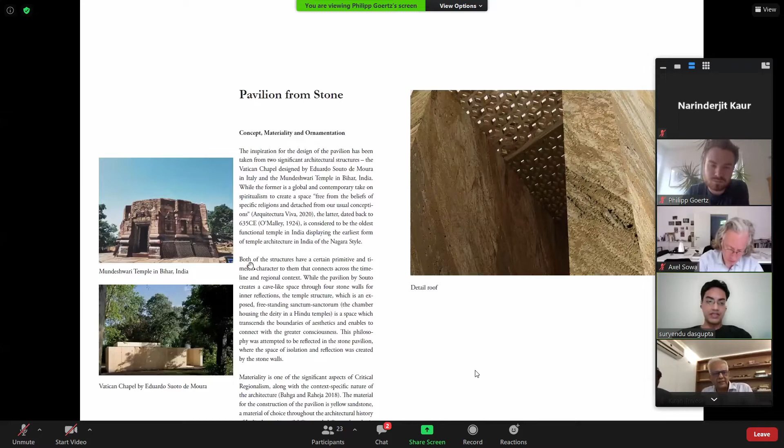A similar concept can be seen in the Vatican Chapel, where a similar kind of space, very plain, very simple and universal, can be seen through the creation of a stone pavilion, where the space gives scope for reflection and meditation. This concept has been taken into the design of the stone pavilion which we have created. The simple stone walls again reflect that same universality of material and aesthetics, which will give that similar space for such reflections. The materiality is another significant aspect of the development of the concept of this stone pavilion, where critical regionalism is one of the critical elements, in fact materiality is one of the critical elements of critical regionalism.

And so the material for this stone pavilion has been chosen as sandstone, which is one of the most celebrated architectural construction elements in India historically, as well as in contemporary times, due to its beautiful aesthetics, the workability of the material, as well as its easy availability. That aspect has been taken as an identity of Indianness in a global perspective, and this transcending architectural style connects the international elements of the stone pavilion with the Indian context of it.

So this is the concept which we have tried to incorporate in the design. For the construction part, I would request Philipp and Aude.

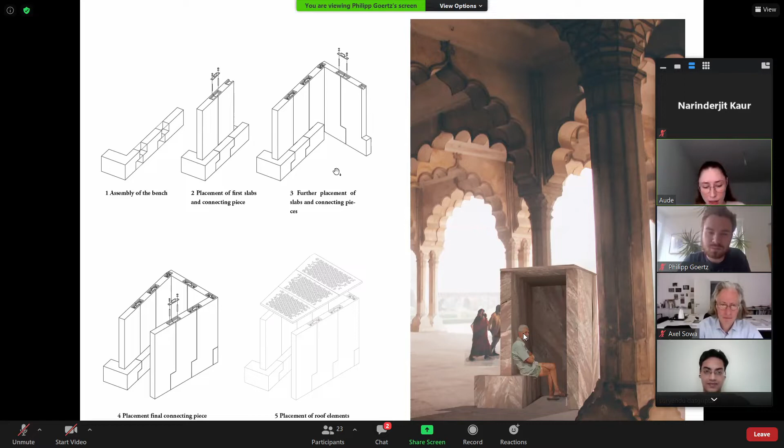For the construction, we begin with the assembly of the bench. It's split into 3 items, each laid down on the back element. The bench allows the placement and connection of the 8 slabs. At the end, we add the roof element on top of the pavilion.

For the system, each slab is equipped with 2 bolt anchors, provided with loop nuts to allow the slabs to be transported and placed in the right position. When 2 slabs are set up, the loop nuts are removed and replaced with a steel T-form connection piece for more safety, improving the stability of the pavilion. This connection piece is also used for the right placement and stability of the 3 lattice roof elements.

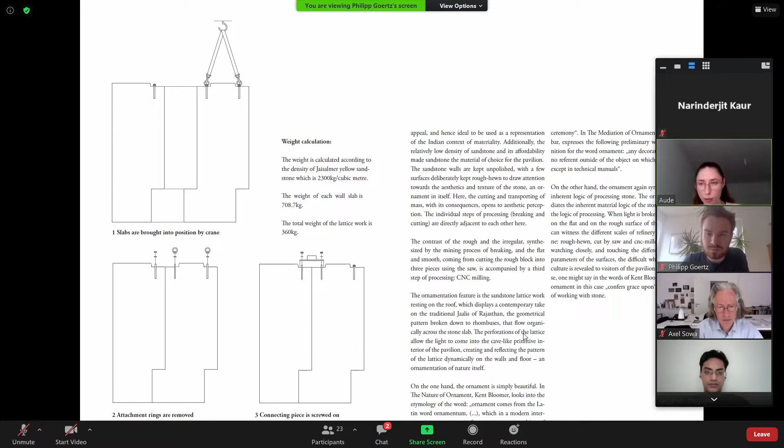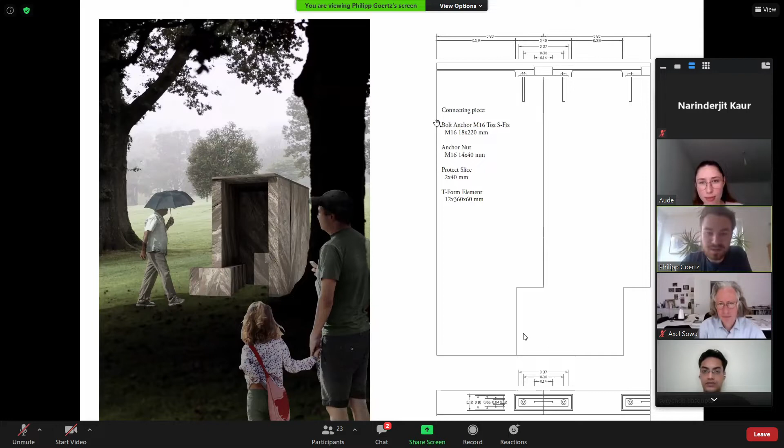Here we can see once again the detail. What interested us in this pavilion was trying to show a bit the material culture that humans apply in treating stone. So what we suggest for the wall slabs is that they come in different kinds of treatments. Some wall elements are kept rough hewn, so it somehow resembles the mining process that comes from the quarry, and it's open to a tactile sensation, visible as well.

As a second layer of refinement, some wall elements can be more flat, like cut by a saw. And as a third layer of refinement, there comes what we thought was CNC milling for the lattice work on the roof, which somehow resembles a very simple kind of ornament.

In the ornamentation part, what interested us was the idea that Kent Bloomer introduced in the nature of ornament, that an ornament confers grace upon an object. So in a certain sense, this lattice work has a certain kind of beauty.

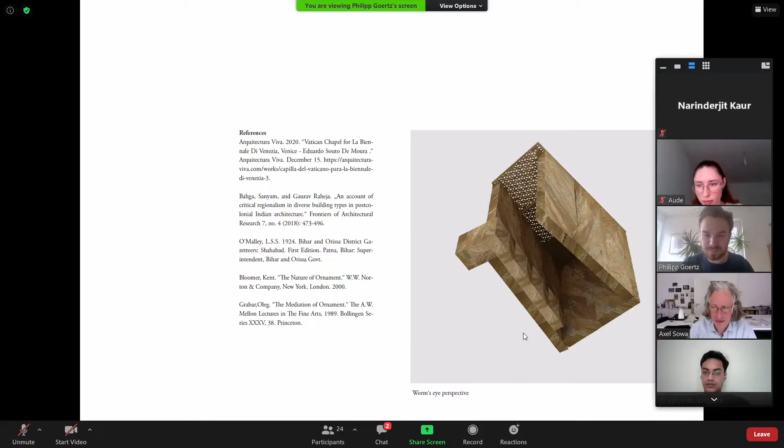What's the height of this one, the first slab, up to the roof? Pavilion height? The total height is 2 meters 14 centimeters. 2 meters 14 centimeters, okay. So you can comfortably walk in, yes. Yeah, comfortably.

In my opinion, it can be easily made. There is no problem in this. It's a decent design and it can be done.

One more question: why in the bottom, when you have taken the tongue and groove type, what's the need of this? Can we take this as a straight line instead? I don't know how it's going to help. You have staggered the joints there. Basically, if we hold the stone from the bottom somehow, and if we are holding the stone on the top, it's not going to topple. In this case also we have to hold it from the bottom, maybe a few inches, so it does not move. But if it's a design part, that's fine. If it is a structural part, then I think we can take the straight joint also. I see.

Yeah, I think it was also a structural idea of ours, that somehow the stones... we can keep it like this. In my opinion, as the structural part, the straight line - if there is a straight line, the structure will stand there. But then I think your design is good. So yeah, it can be both ways, and this can be manufactured.

We had a little different approach, and our group was first Ranjal, Parshant, Alexandra, and me. Our approach was to come from another direction. We thought more...

We had in mind that it would be nice to have a stone exhibition inside the pavilion. So there is the pavilion itself, and then there is this exhibition. And we summed up the goals our pavilion wants to achieve.

It wants to be easy to set up, to transport and ship, because it will be a traveling pavilion. It wants to reflect the process of traveling by picking up exhibition elements at each stop. It wants to show local stone culture and craftsmanship through this growing exhibition. It wants to offer a flexible space for the exhibition as well as other activities.

It wants to offer the viability to create a new shape with every new setup. It wants to connect with the traditions of stone architecture. And last but not least, it wants to be a modern stone pavilion. While thinking about how this all fits together, we thought about...

A flexible wall was our solution. We got inspired by the Jali walls. What was very important for us was that it was possible with our modules to create different floor plans at every new spot the pavilion travels to.

So maybe we are in Roorkee, and the pavilion gets the shape the people who set it up in Roorkee have in mind. When it travels to another destination, the people there may want to present the pavilion in a different way and highlight other pieces of the exhibition, so they can come up with a different shape and maybe react to the buildings surrounding the pavilion.

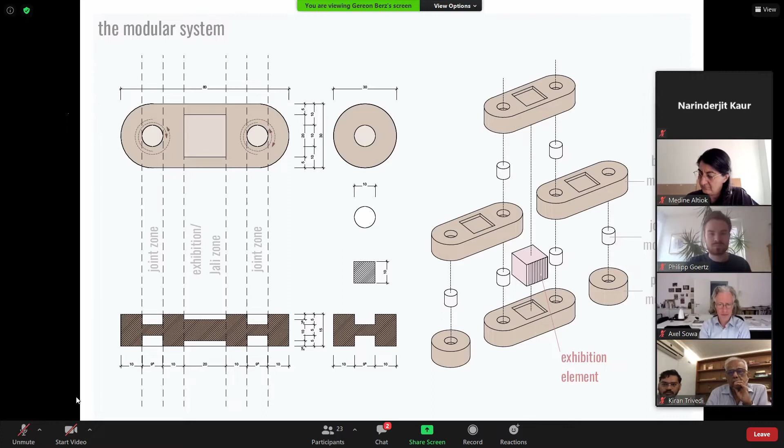For this wall, we created a modular system. To make the flexible floor plans possible, we thought about a rotating system. So we have this base module, and in the connection between the base module and maybe a pillar module, there is this joint part, so the pavilion can rotate through the spots and still has this hole in the middle where the exhibition can happen.

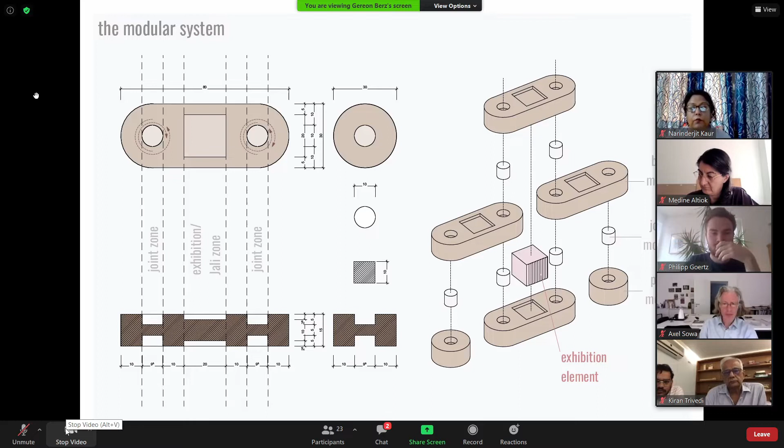Next, we thought about the manufacturing. It was said that it would be best to deal with leftover pieces from the quarries, so we thought about a small module that can be carried by hand, so we don't need big machines at the site where the pavilion should be built.

It would be nice if the element is smaller, so we can deal with smaller leftover pieces of stone. We thought of two different types of stone because they are very available in India. We were told for the base module and the pillar module to use sandstone because it's less heavy than other kinds of stones, and it's easy to manufacture.

For the joint module, we thought about marble because it's stronger, and for the joinery there has to be, in our opinion, a stone that is not as soft as sandstone. So here marble, and the pieces are quite small, like 10 by 10 centimeters for the joint piece. The base module, for example, is like 15 by 80 by 30 centimeters.

So it really can be made out of smaller pieces, and if they're bigger pieces, you can just saw them and cut them into the right shape. The exhibition elements can actually be made out of any kind of stone, to show the possibilities in working with stone.

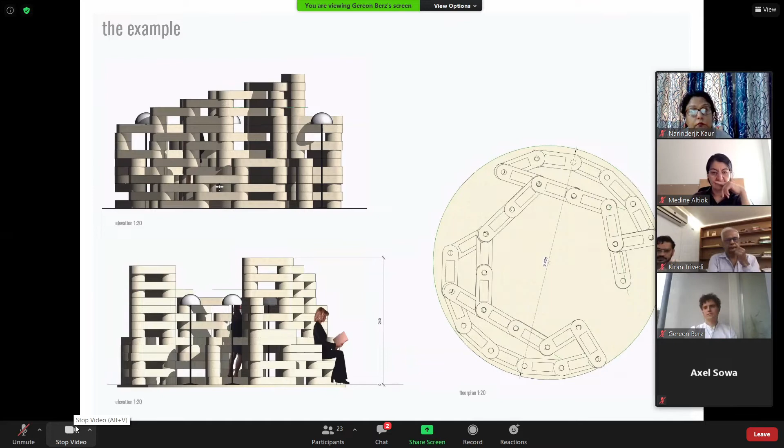So this is the basic plan, a circular fencing, which not only provides an outer fencing but also holds up certain members of the inner core and provides more structural stability to the inner side. And these are the elevations which are produced.

As we have already told, it is quite versatile to make different arrangements, to give thought and process your thought process by using these modules in the form of Lego. So these are the various kinds of arrangements we have tried to create through these modules.

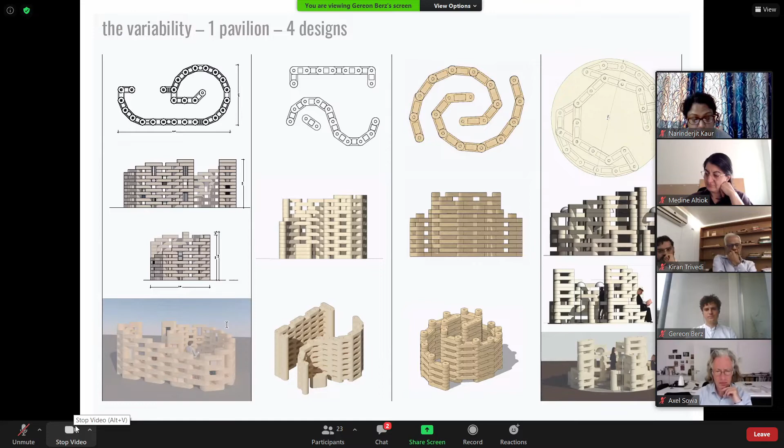So at different places it actually provides a different appearance according to the skill sets and according to the thought process which all the people at the assembly place would be having. So this almost finishes our presentation.

Okay, thank you to this second group of Pranjal, Harshant, Gereon, and Alexandra, who propose a modular system with many parts that can be assembled according to local requirements or ideas, with the possibility of displaying within the interstices stone samples which can show the variety of Indian stones. So we would be grateful for reactions on this.

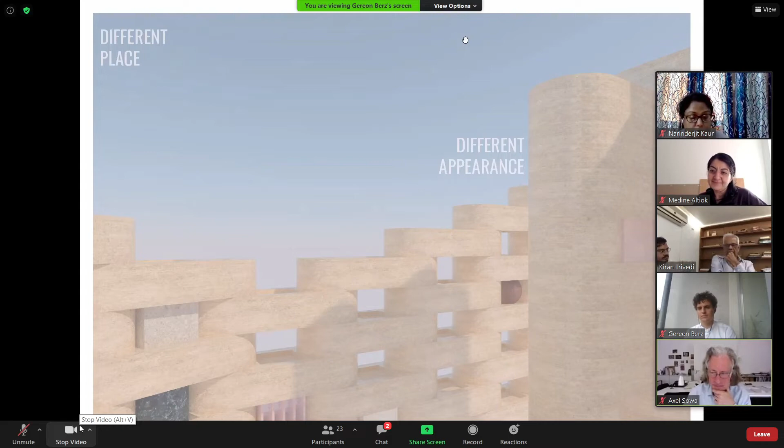Mukul sir, can you hear me? Yes, please. Would you like to go first?

For me, this is a wonderful design. They have provided 4 options for assembling the entire modular structure. It's a wonderful initiative by the students. From an architect's perspective, I am not an architect, so I cannot comment from that perspective.

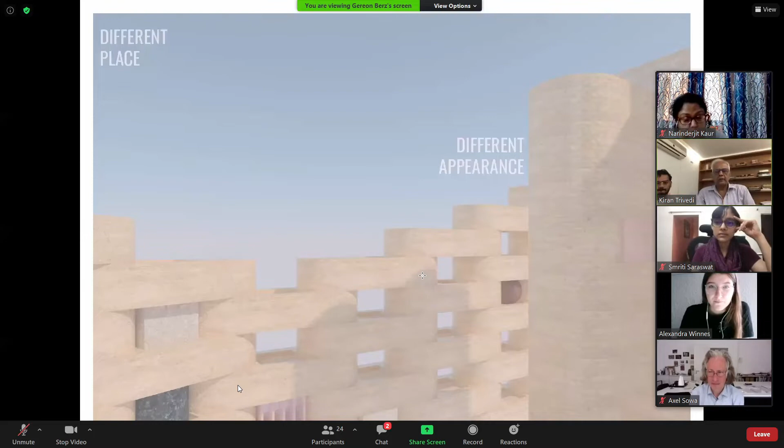See, the manufacturing, as far as we are the manufacturers of this kind of stones, is quite easy. Only once we do it practically, once we manufacture with the sandstone, we have to check where you put the marble dowels inside the pin while shifting again and again.

Once we dismantle and fix it again in a different shape, or carry it from one place to another, we may have to go for steel SS pins instead of stone pins, and we may have to give an SS cover also, which goes inside the pin, so the stone will not be damaged. Otherwise, once we use it many times, the stone can get some play inside.

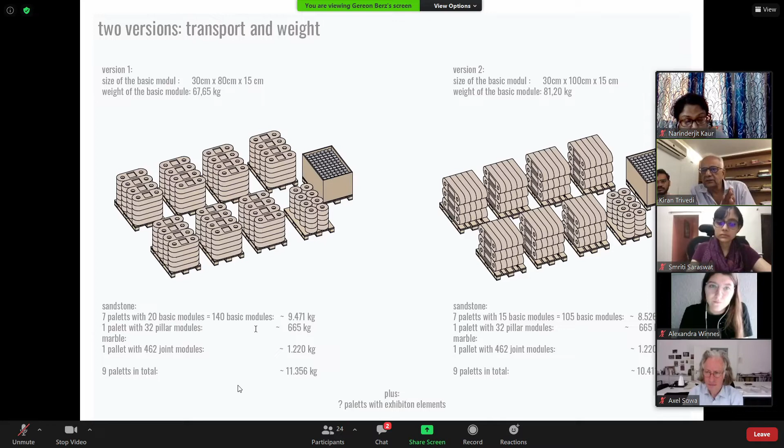So once we try, it's trial and error, but we can do it. This pin, maybe we can think about it. I'm not sure right now. We can try with the marble or granite pin, which goes inside what you have shown here, the connecting pins.

Would you even think it's necessary to protect the hole with a cylinder of steel? Yes, because I think sandstone might also be a bit vulnerable or break at the border. Yeah, once we...

We have to check once. There are some other methods, that once we do the sandstone, the same day we can protect it with epoxy. So once we put the epoxy inside, it will prevent it from any damage, and that part, the inner part, will become hard.

So that way also we can protect it. If we don't want to use any steel, just marble and the same sandstone, it can be done.

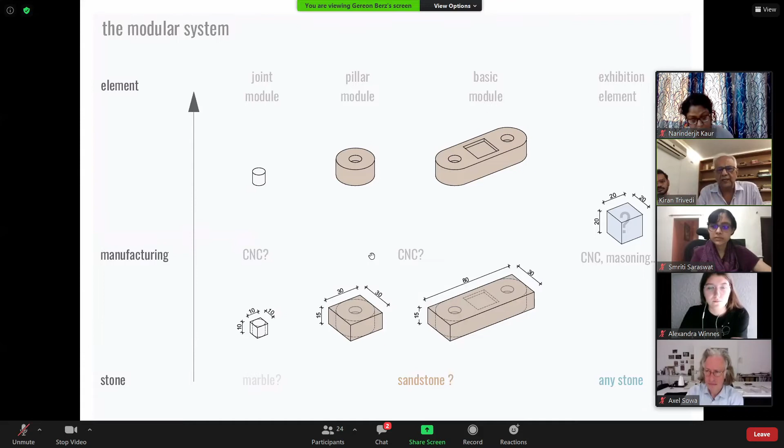I think the total height is around 10 feet, what I assume. As per the scale, the total height is going to 10 feet, right? Yes sir, the maximum is around 3 meters. 10 feet is fine, sir. Whatever their height is as per the designer side, but approximately when we go up to that height, it is good. We can assemble it in the factory, in a few pieces.

If we think this single connection is not good, maybe we can think of providing a single pipe and pour it inside all the pieces.

I think the advantage, beyond the variety to which it opens, is also that the wall design stabilizes the shape in creating certain kinds of lines. So I think it looks very good. It's a nice design and it's achievable.

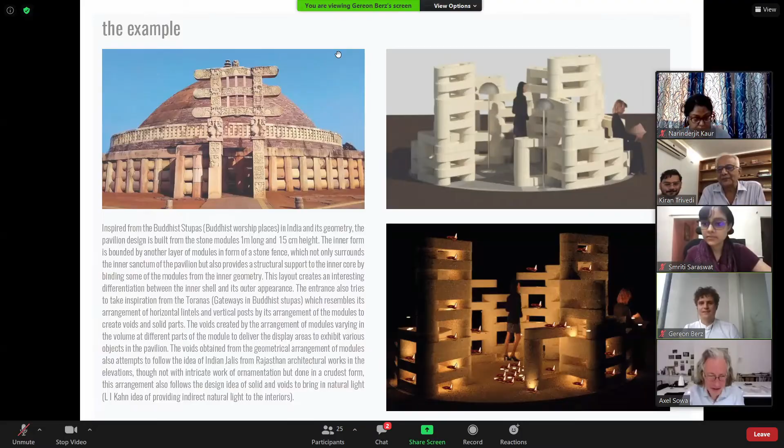Thank you for this positive reaction. And we would like to go on with the third group, which I invite. Sorry to interfere, Mukul sir had some observations regarding the first presentation, which he had to leave in between because of an important call. Oh okay, sorry for this. Yeah please, Mukul sir.

Smriti, I'm sorry, I haven't seen the first presentation entirely. After the first slide, I had to leave for an urgent call, so it would not be appropriate to comment on something I haven't seen properly. Sure, sure, we can come back to it later and run through it briefly. Okay, all right.

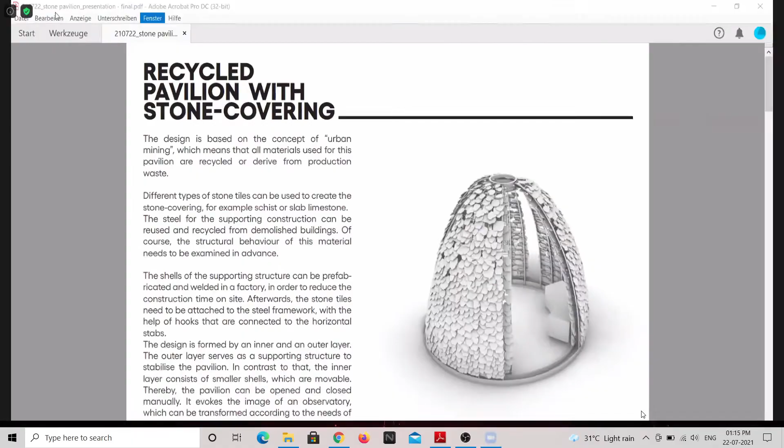Okay, so maybe we can go on then. Then I'll share the screen, just a second. Okay, I hope it's visible now.

So our pavilion is based on the concept of urban mining, meaning all materials used for this pavilion are meant to be recycled or derived from production waste. So we thought about a pavilion which consists of a steel structure covered with stone tiles derived from production waste. Different kinds of stone tiles can be used to create the outer layer of the pavilion, for example schist tiles or slab limestone, basically any type of stone which can be cut into thin tiles.

And the steel for the supporting structure can be reused and recycled from demolished buildings. Our pavilion consists of 3 outer shells and 6 inner shells, which are basically constructed by the same principle: this steel substructure and the stone tile covering.

We think that the steel frame can be prefabricated and welded in a factory, so we can reduce the construction time on site. Afterwards, the stone tiles just need to be attached on the exhibition site. The goals we wanted to achieve are to see the pavilion as a collection of Indian stones, and the pattern of the stone tiles creates the ornament of the pavilion.

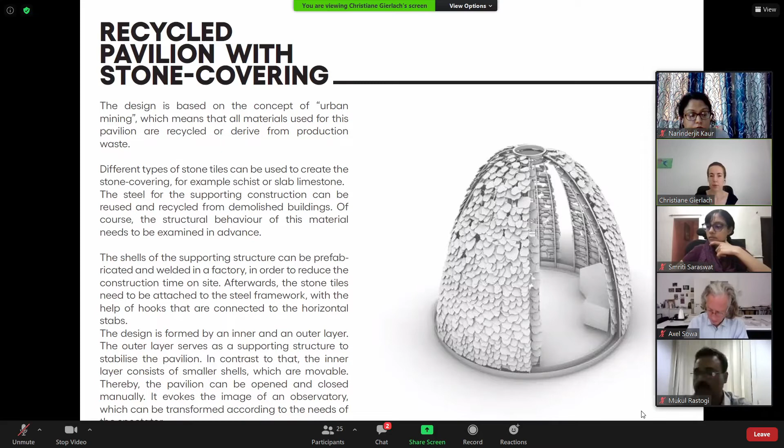The second goal was to generate reference between inside and outside, which we achieved by decreasing the amount of tiles at the top of the pavilion. This dematerialization adds a second layer of ornament to the pavilion, because light can drip through the holes between the tiles, so on the inside there will also be a pattern of light created by these holes.

Those are the floor plan and the elevation, or the perspectives of the pavilion. Here you see two different options, different options of how the pavilion can look.

I think I forgot to mention that we want the outer layer, the 3 shells on the outside layer, to be stable. The 6 shells on the inner layer will be movable with wheels on the top and bottom. So this pavilion can be moved like an observatory, where you can move the entrance and close the pavilion if the spectator wants it, or open it manually.

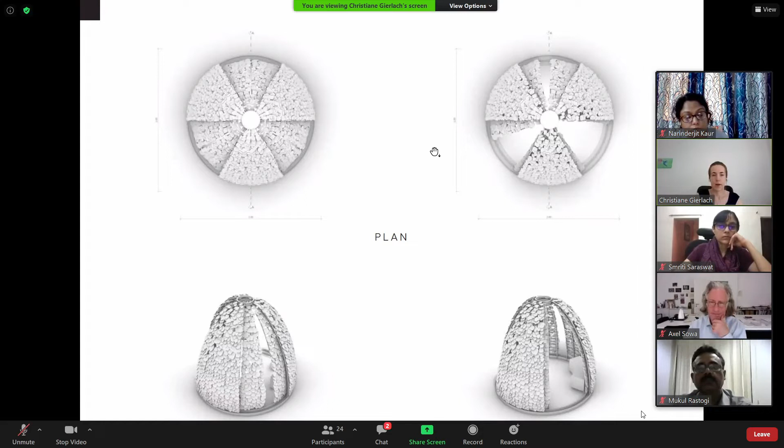So the pavilion can have different appearances. Those are the elevations, again with different options of opening or closing the pavilion. And this is our section.

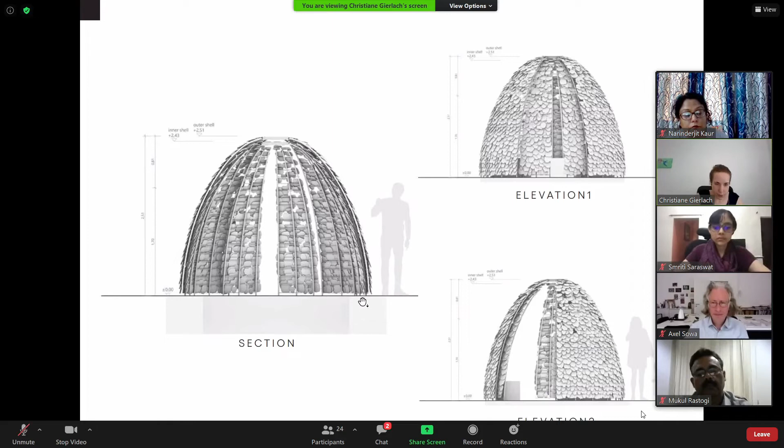We want to lay the pavilion on... or maybe we can explain it better in the details. Rosa, would you like to take over this part?

Yes, of course. So maybe I'm just briefly going to explain how we think the pavilion could work construction-wise. At the top, there will be basically one metal ring, like a steel plate, and to that the inner circle and the outer circle is fixed, those steel frames.

The outer shell, as we said, will be consisting of 3 parts, and they are connected at the top by a U profile where the whole steel structure is fixed to, which will then be connected to this inner metal circle. Down from there, there's the inner parts, the 6 parts, that have a little distance to the top part so that they can easily move.

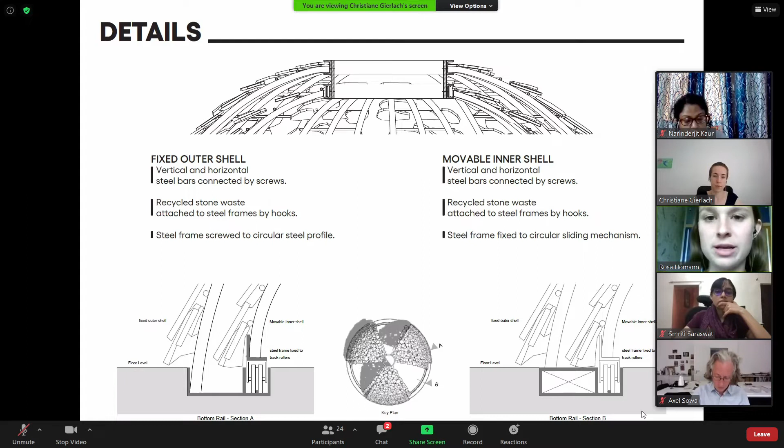Then there are rail tracks on the side, so the rollers will go along this track, and then there will be a wheel part where it's like a fixed stick to it, so that from there the steel frame will be attached, and then this can be moved.

Then to see how it looks at the bottom, there's one part where we have this whole round steel profile, where in the inner part there is the rail track so that the wheels can be put in there, and from that there will be an L-shaped profile stuck to it, so that the steel frame can be on that, and then it is completely fixed by that, but the wheels will still be able to move.

On the outer part of this circular steel structure, there will be a fixed part to it, so that it makes it stable and it cannot be moved as much. And then, of course, there will be the opening parts, if you look at the right, where there's not the fixed steel shell. There we will have some hollow profile so that you won't step into a hole when you get into the pavilion.

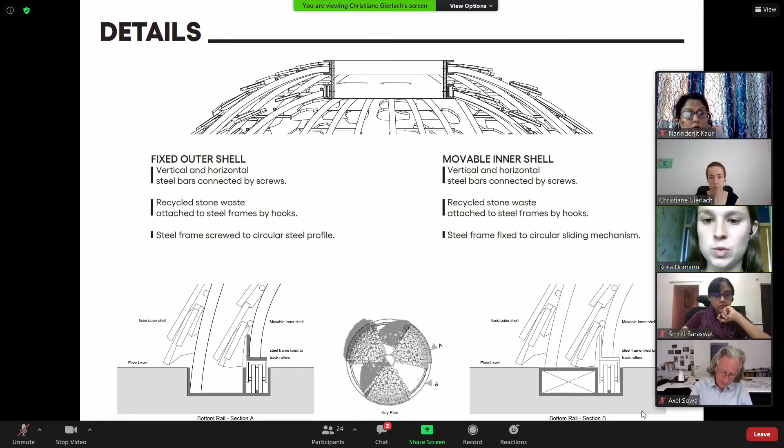Should I just continue presenting everything, or does anyone else want to continue presenting? I don't know if Ruta is connected. Maybe. Yes, yes. Okay, thank you.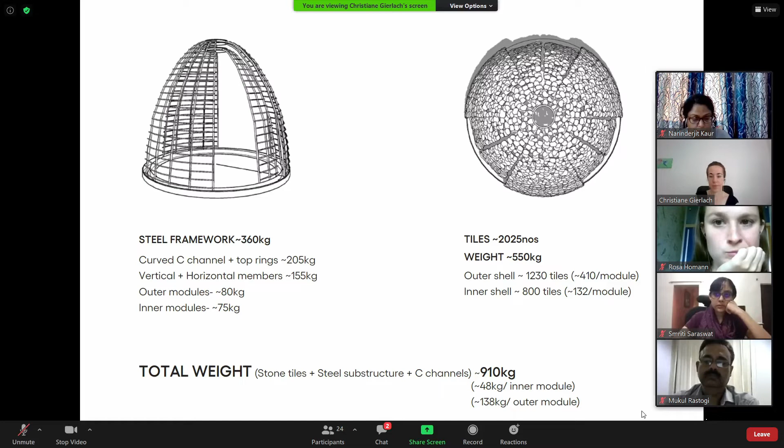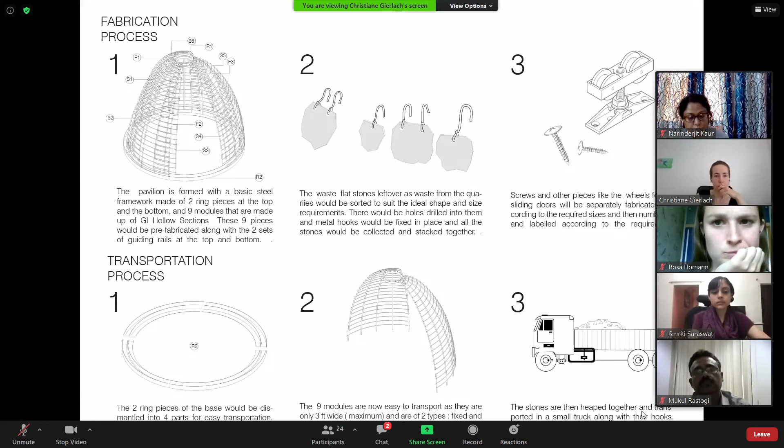For assembling these outer frames, outer and inner frame members will be numbered as shown in this image. We prefer not to number stone pieces so that we can have different appearances every time we assemble this pavilion. But for a quick installation, we can number these stone tiles too, following the same number pattern, for example, a number extension of its holding horizontal member.

Then these stone pieces would have holes drilled into them with metal hooks tied to them. All these pieces can be collected and stacked together. The rails can be dismantled into 2 or 4 parts for easy transportation, and the main framework would be easy to transport as it's just about 3 feet wide.

Yeah, thank you to your group. Very interesting work. We discussed it a lot in terms of a kind of textile structure and the transformation of waste into a delightful surface. So yeah, if you would like to react on it.

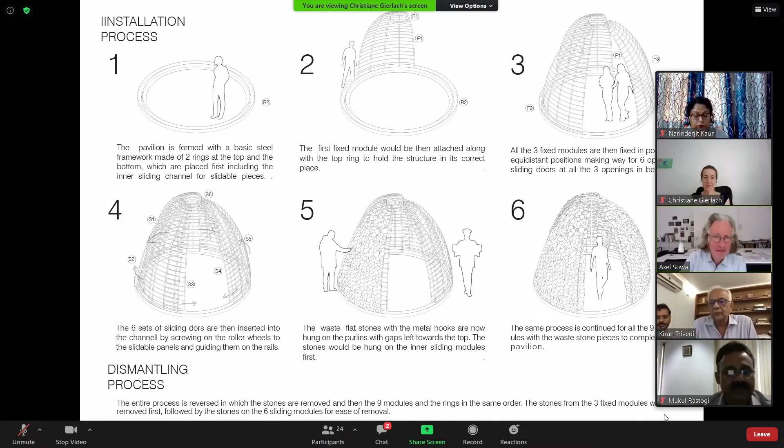Are there more reactions to it? Kiran, yeah, if you would like to. See, in my opinion, the design is fantastic, and there's no role of the stone manufacturer needed, because you just need the waste of the stones, and you can build some pens inside and hang it. It's a nice concept, and while you are moving also the inside part, it's interesting. When the stones move, you can listen to some music.

I mean, they're going to clash with each other, and there's going to be a nice sound when you move, and you are not going to move it very fast, you are going to move it slowly. So I don't think there's any problem. It looks very nice, nice design.

It reminded me a bit of observatories, you know, to open up the cupola and see the stars at night. So I think there are many references. Beautiful design. Yeah, thank you so much.

It looked the most wonderful in Rajasthan, gazing at stars at night. Yeah, we call it dhani in the local language. If you remember, the right word for this is dhani, which we used in the desert area, like in Jaisalmer and all, they make it in this shape. Yes, yes, yes. Yeah, here unfortunately at night there's a lot of pollution and polluting light, so we don't see the stars anymore.

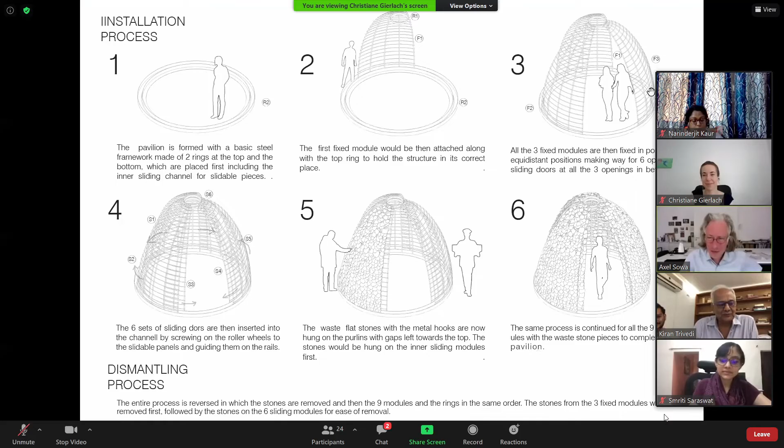So we will continue with, in our group, Vesela, Dhruv, Varun, and Chandradeep. We try to work on the tectonics of the stone. So in the very beginning, as an introduction, the cultural inspiration, it was firstly we try to find a geometry that is often seen in India, and we wanted to go back to the building of the arches and to emphasize different spaces.

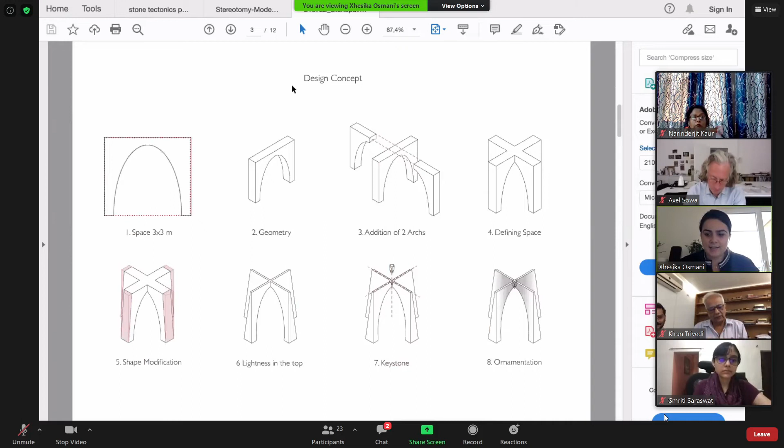We added some different important buildings, and also what inspired us a lot was the ornament, and it's a nice cultural thing, and also that shows identity to the place to where it's built. As a design concept, we started firstly to define the space.

That is 3 times 3 meters, and we tried to make the geometry that fits to it. Our stone pavilion has a basic structure of function, and the material qualities will be showcased in the form of an arch. The heavy and robust structure of the stone is emphasized in its simple geometry.

It goes back to the time of how we use stone, and we tried to build the structure also depending on the statics. The orthogonal addition of the two arches becomes one module of the pavilion, so it offers spaces inside the pavilion and underneath it. So there are spaces in between.

We tried to modify the shape so we could make it more lighter, and we tried to exemplify the notion of lightness also by trying to reduce the weight on the top. So when the light falls to the pavilion, it also emphasizes a holy character.

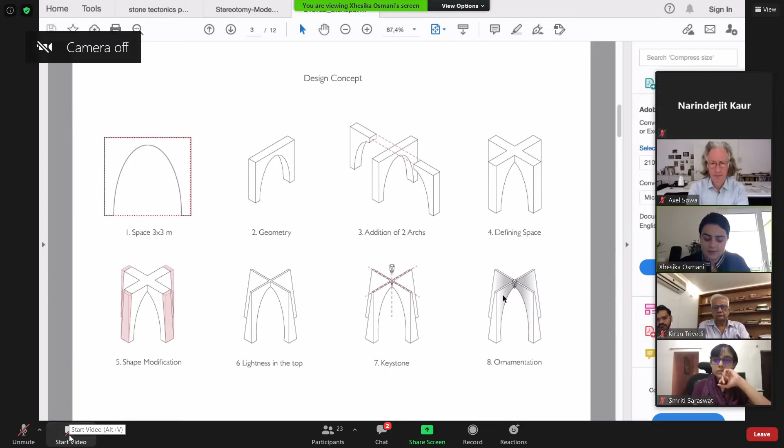The 4 elements are held from the keystone in the middle, and we decided to also make the ornamentation on the sides of the pavilion. As I said, this shows identity and differentiates depending on which country it's built in, and for us it also exemplifies the notion of lightness.

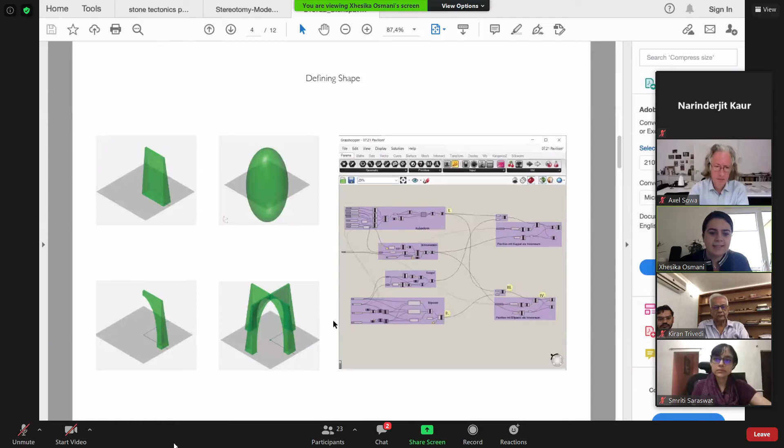We tried to define different shapes and used programs to make the right prototype, also defining how many types of arches we want to use. We tried with 4 and 5, and also tried to modify the lightness so the pavilion also tries to have this lightness at the top.

You can also see the space inside of the pavilion. It can be used for different purposes, also as an exhibition, or as a place for yoga, or as a place for meditation.

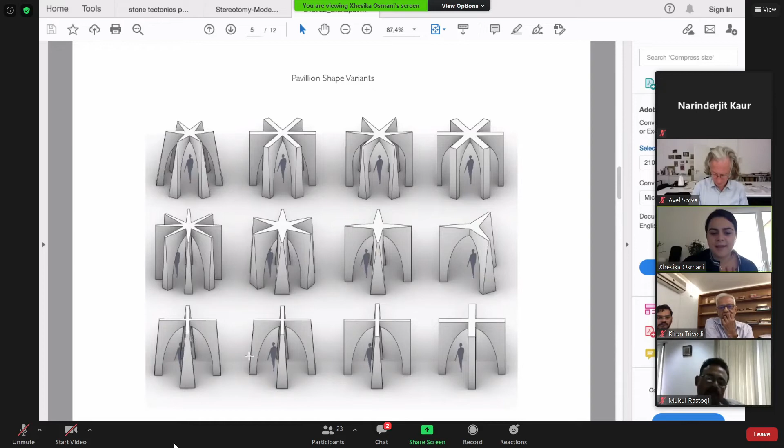Also, it has no roof, so it is defined from the space that you are inside, but you feel that you are also on the outside. In these variations that we did before we decided on the final one, it was really important to see what the view is when you sit inside the pavilion—does it reduce the light, or is it heavier when you see it through the sky?

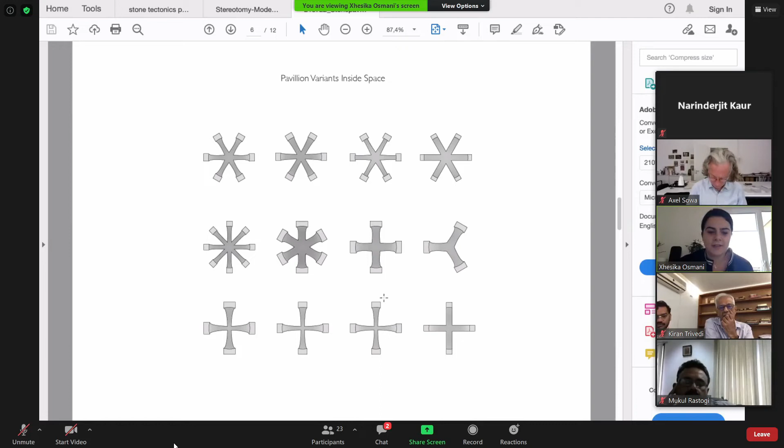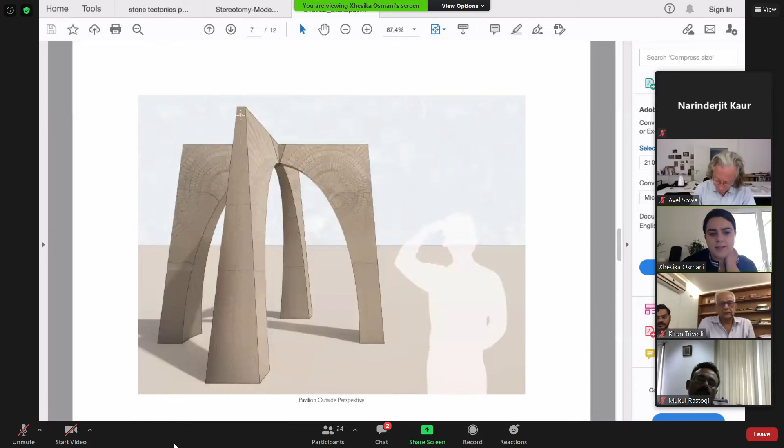So we wanted to open it a little bit, and we came up with this prototype that has two arcs coming together held from the keystone in the middle. We use the ornamentation at the top, so it reduces to the ground as the light falls to the pavilion, and we try to use these big modules to define the cutting slices that will come later in the detail part.

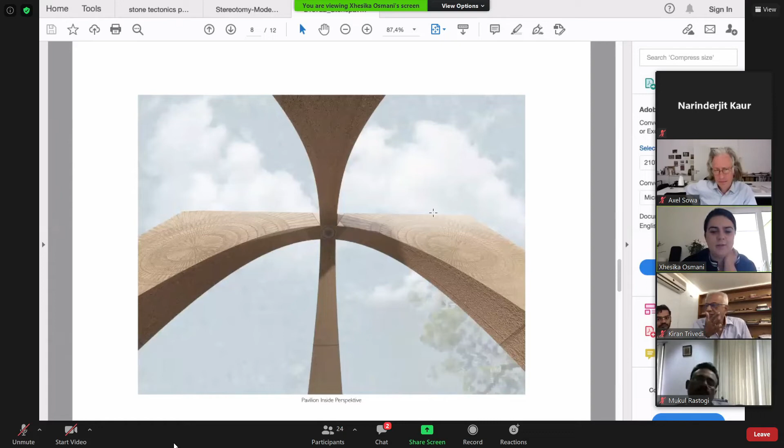The view from the inside of the pavilion, when you sit inside, would be like this. As I said, the weight reduction and looking to the sky while still feeling protected that you are inside, and there's enough space also for more than one person.

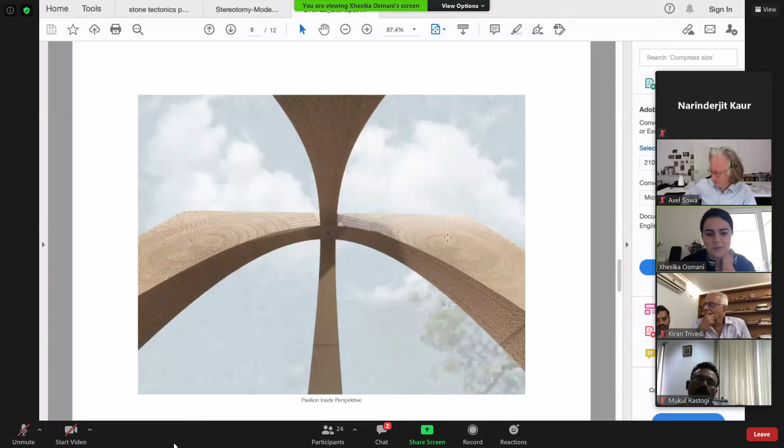Here there is this view when you go to the inside of the pavilion, so you see the light also to the sides, and the cultural identity.

We didn't define the ornamentation. We just used, firstly, one to show how it would look like. For sure, it can also be defined differently, like this.

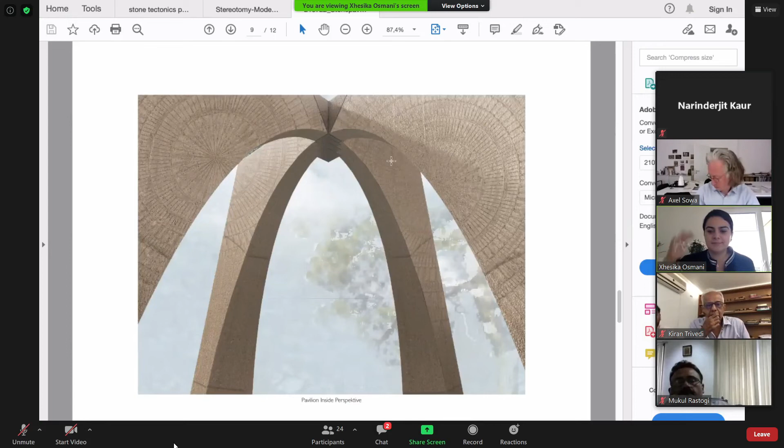With the ornaments and the pavilion losing the weight through the sky, we try to show this lightness of this massive stone blocks. And Vesela, would you like to continue and talk about more?

So we went a bit above the measurements that were given, so that we can create enough space as a negative in the pavilion for enough people.

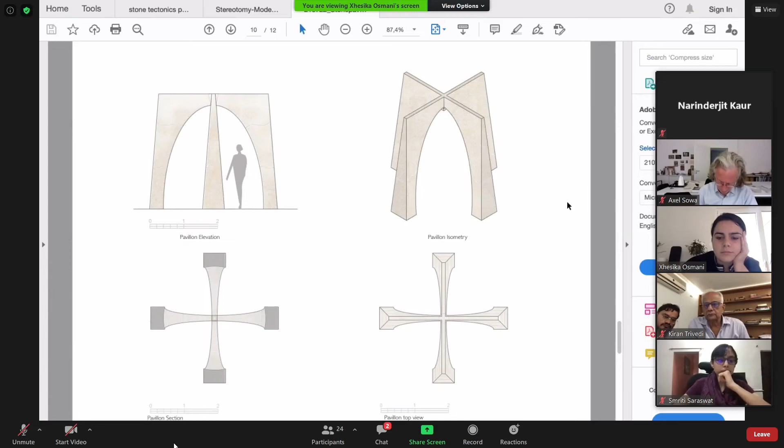I think we can go to the next slide. Yeah, here is our concept of how the pavilion will come together. Each arm of the arch is divided into 3 parts, and is connected through a curved joint, which we'll discuss later. All the parts are then held up with a keystone in the middle.

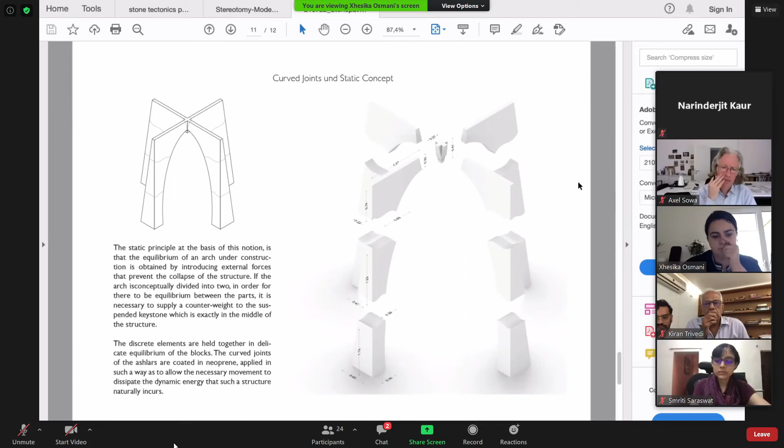So our idea of how the individual parts will be held together is without any mechanical joints, or without any mortar. We found a really nice concept that utilizes a rubber sheet between the joints, and also the joints have a curve that defies gravity, and creates an interlocking joint. We believe that in this way our pavilion will be easy to construct, but also then to deconstruct.

Thank you for the fourth group for your presentation and showing us this very nice evocation of an inner space just indicated by arches. We discussed it as a Gothic contribution, also because of the catenary form of the arches, which are somehow ideal for conducting the forces into the ground without creating too much horizontal pressure. Thank you for this.

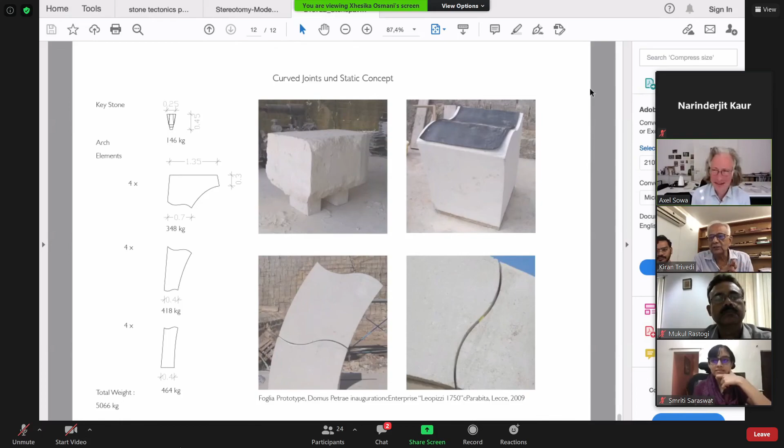Okay, thank you. This is really a great offer. We would like to do some trials, so you can send me the drawing. I can send you the video of how the machine is working. Yes, and I can share the video of how we are doing it.

We are very much interested in this process of manufacturing, and it's of course a great learning exercise for us, how the design evolves into real matter. So this is wonderful. Yeah, great, that gives pleasure to the designers also a lot.

It would be nicer if we can professionally shoot the making of the prototypes, and I would request you to allow a professional team from our end to be situated in the area of your workshop where it gets made and assembled, and their team could shoot time lapse and other things from step 1 to the last step, whatever it is. So details I can definitely discuss with you later. Thank you so much.

From our part, we can provide space for this, be it in CDOS campus or during the exhibition time. The exhibition is scheduled during February, so we have almost 6-7 months lead time from now. We can definitely provide space for this entire project in the exhibition as well. And we have a permanent display center in CDOS, so these could be installed there also. After the exhibition, they may be stationed permanently there, or in case you want to shift them after some time, that can also be possible.